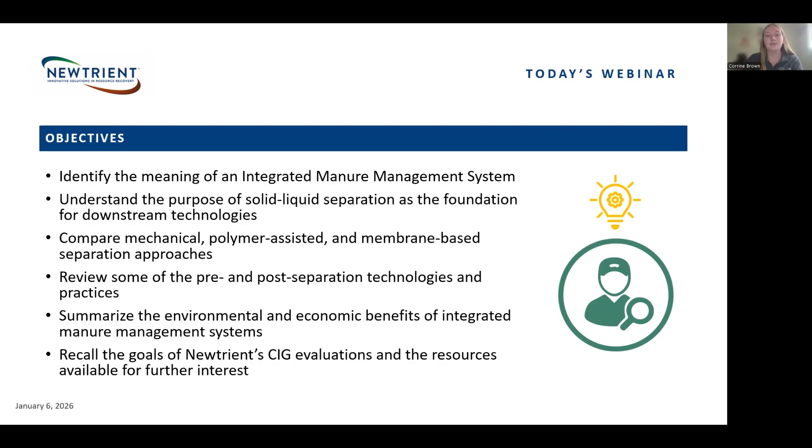Now for a bit about Newtrient. Newtrient was founded in 2015 to help farms identify ways to reduce their environmental footprint while making it economically viable for them to do so.

Our forward-thinking members include milk cooperatives and dairy organizations representing nearly all U.S. dairy farmers.

In 2020, Newtrient received nearly $700,000 from the NRCS to evaluate 15 technology systems and practices, with the addition of one literature review, aiming to demonstrate how these systems reduce the environmental impact of dairy manure with a focus on water quality. Our goal is to improve access to EQIP funding for innovative technologies under Conservation Practice Standard 629 and other associated standards. Partnering with universities nationwide, we collect samples, document the results, and produce comprehensive reports. These reports will be shared with the NRCS and the dairy industry to encourage the adoption of sustainable dairy practices.

With that, I'm excited to introduce Jeff Porter, Technical Advisor here at Newtrient, an agriculture engineer with extensive background with the NRCS, where he served as the leader of the National Animal Manure and Nutrient Management Team.

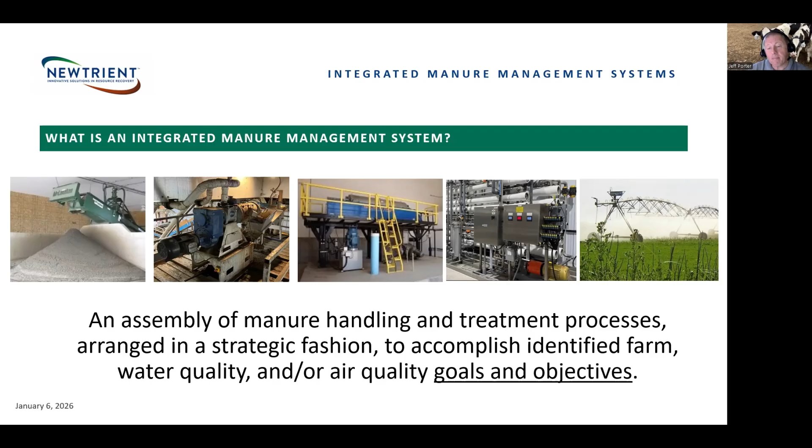Now, the easiest way to look at this is to determine what comes into the system or operation and then what goes out, looking at the big picture, you might say.

Unfortunately, this may not be the most effective way of evaluating manure management technologies. One may not know what goes on inside the operation to get to the individual unit process values.

Even though there is an overall system or grouping of technologies, each process in and of itself should be evaluated separately to determine how it is affecting the operation of the overall system. It's important to break the manure management system into its individual unit processes.

This is where it is important to understand the difference between systems and individual or unit processes. These processes make up the overall system. As one looks at the treatment of animal manure, the individual operations can normally be divided into three main groups of processes: physical processes, chemical processes, and biological processes.

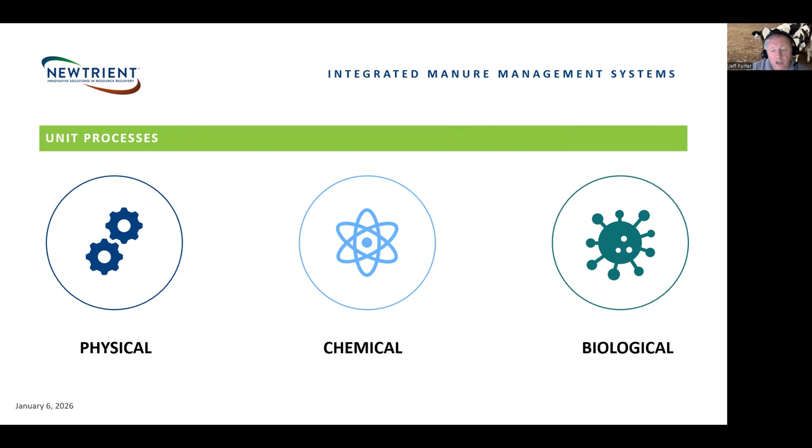And when looking at waste separation, most of the processes are physical. But there are some technologies that utilize chemical processes to enhance the overall separation process.

When looking at a dairy and the overall system operation, there are a number of factors that should be evaluated to help the producer select the technology or technologies that will best meet the needs for that particular dairy. Here we just see a few of the items that should probably be addressed.

And I think first and foremost is that of the landowner's goals and objectives. What do they hope to get out of implementing any of these technologies or practices that they are currently looking at? Are they actually addressing any resource concerns that they may have?

Are they dealing with any excess nutrients? Do they have more nitrogen than they need, or more phosphorus than they need, or do they need to separate it into different partitioning of those nutrients because of the nutrient imbalance between the manure's nutrient levels versus what is needed for crop production?

How much land is available for them to land apply the manure? And also how much land is required based on how much manure they do have.

How do they want to handle the waste streams? Do they want to look at just dealing with solids? Do they want just liquids? Or do they want to look at a combination of both?

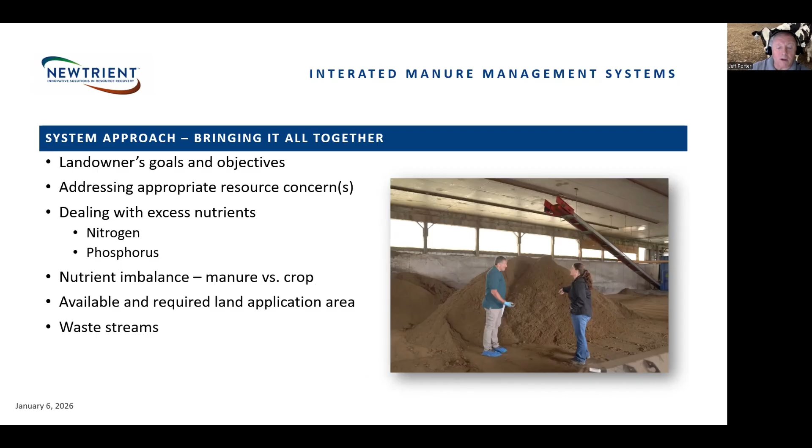These are just a few of the things that they need to be looking at when trying to determine what technology is going to be working best for their particular system or operation.

Now, as part of this conservation innovation grant, we looked at a number of different technologies and processes, all centered to a certain extent around waste separation. I've broken our technology reviews into three sections: pre-separation, waste separation, and post-separation.

Even though there are many more technologies and more are being added almost on a daily basis, these are the ones we reviewed during this study.

Now, one will notice that I included vibratory screen under both pre-separation and separation. As we have reviewed various technologies, we have seen vibratory screens used for both purposes.

Now, to review the information for each of these technologies and evaluations that we did, we're going to be addressing that towards the end of this webinar.

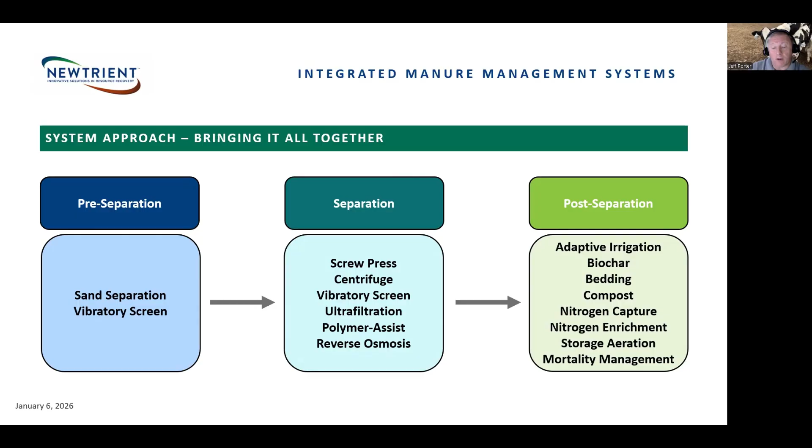Here we see an example manure management system. Since the dairy uses sand bedding, sand separation is necessary for a few reasons. First, the sand can be reused for bedding, which helps reduce the cost of purchasing additional bedding.

Second, sand is very gritty and can have negative impacts on mechanical equipment downstream. Sand removal will help extend the life of other waste separation technologies. Once the sand has been removed, the waste stream flows through a coarse solid separation system.

Some common technologies include screw presses, rotary drums, and slope screens. Now, even though most phosphorus and organic nitrogen is retained in the manure solids, only a small portion, around 10 to 15%, are captured in the coarse solids.

And if higher percentages of nutrient removal is needed, fine solid separation technology such as centrifuges can be utilized. Approximately 50% of phosphorus and organic nitrogen can be collected in the fine solids.

Utilizing ultrafiltration or polymer assisted separation can capture nearly all of the suspended solids, including nearly all of the phosphorus from the waste stream. Reverse osmosis can also be incorporated to remove nearly all of the dissolved solids and the remaining nitrogen.

Now, ultrafiltration and reverse osmosis result in multiple liquid streams with varying nutrient loads, whereas the polymer assisted system can have both liquid and solid as your waste streams.

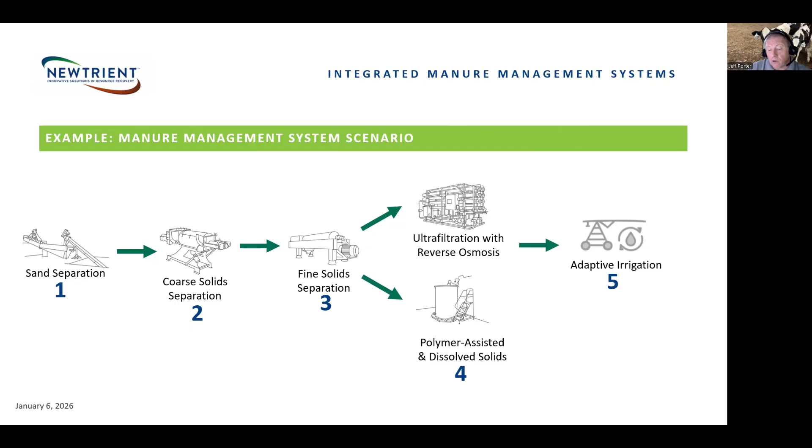The level of waste separation that is needed is dependent on the end use and, again, the producer's goals and objectives. Land application of liquid manures can be utilized following many of these separation technologies.

Let's go into a little more detail into the importance of waste separation and the factors to consider when looking to handle manure and the end uses.

When dealing with manure management, there are usually a number of different challenges or resource concerns that may need to be addressed. Even though every dairy operation is unique, similar challenges are often encountered.

Both water and air quality issues are common concerns. Due to manure solids, waste transfer through pipes and irrigation nozzles can be challenging. Manure nutrient and crop requirement imbalances often have to be addressed as well.

Now, all of these concerns and other issues are why solid liquid separation should be considered when dealing with manure management. Nutrient partitioning is a common reason for implementing waste separation.

Removal of solids from the liquid waste stream minimizes solid buildup in storage facilities and can also lower energy costs by reducing agitation and pumping costs. Other treatment unit processes, such as composting and biochar production, benefit from waste separation practices.

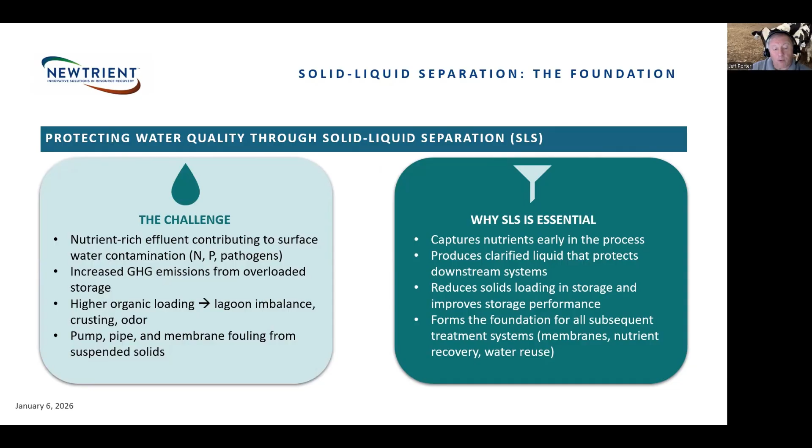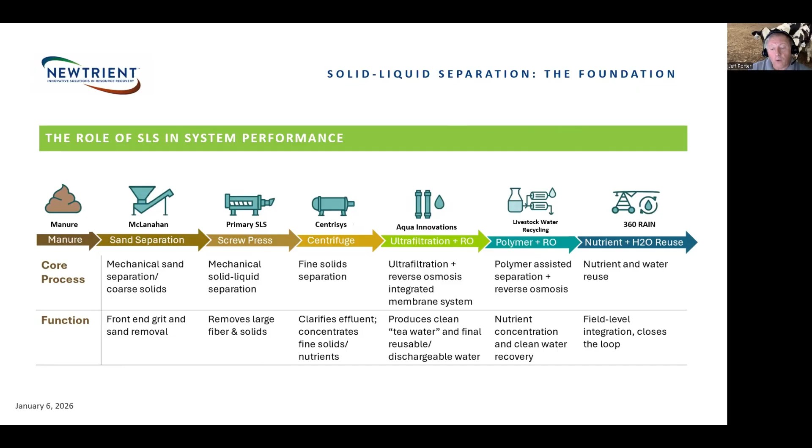The McLanahan mechanical sand separation system removes sand from the waste stream to be reused as bedding and serves as a pre-separation technology, removing grit and reducing wear and tear on downstream equipment. It also reduces the buildup of sand, which is hard to remove from waste storage facilities. There are several models and configurations available for varying herd sizes and layouts.

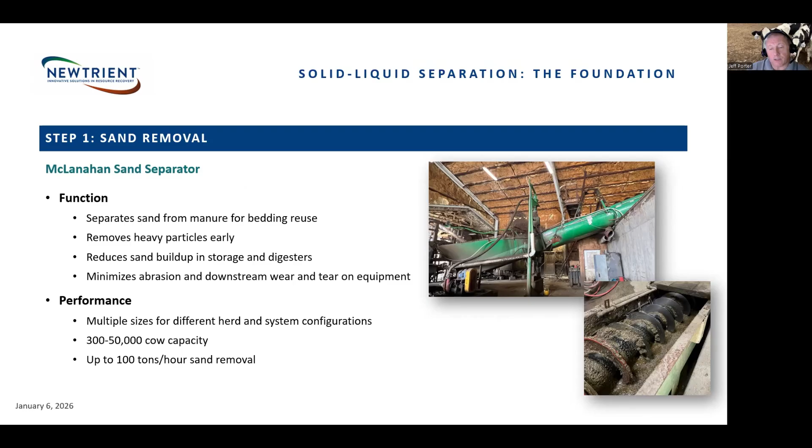Screw presses and slope screens were used in most of the evaluations to prepare the waste streams to improve downstream technology functions through our Conservation Innovation Grant reviews. Rotary drums and vibratory screens are also popular coarse solid separation technologies.

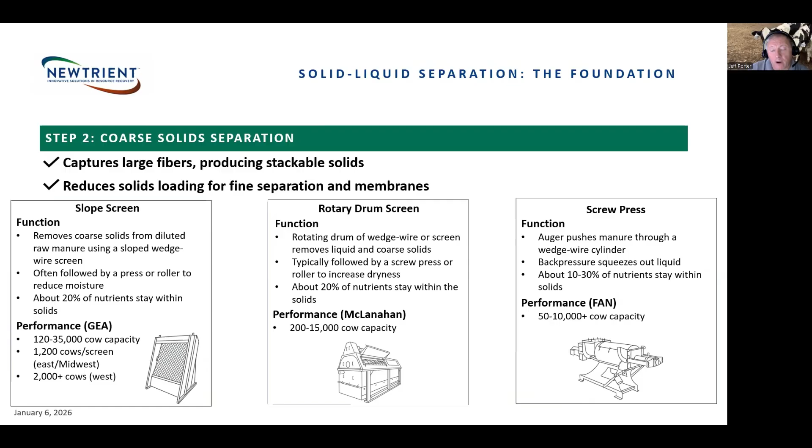These solids, for the most part, are stackable. Depending on the results, moisture content, and different things, these solids could be used for bedding, composted, or directly land applied. Removal of the coarse solids helps reduce the solids loading and operation and maintenance of downstream fine solid separation unit processes. Coarse solid separation technologies can be adapted for a range of dairy operations from small to very large.

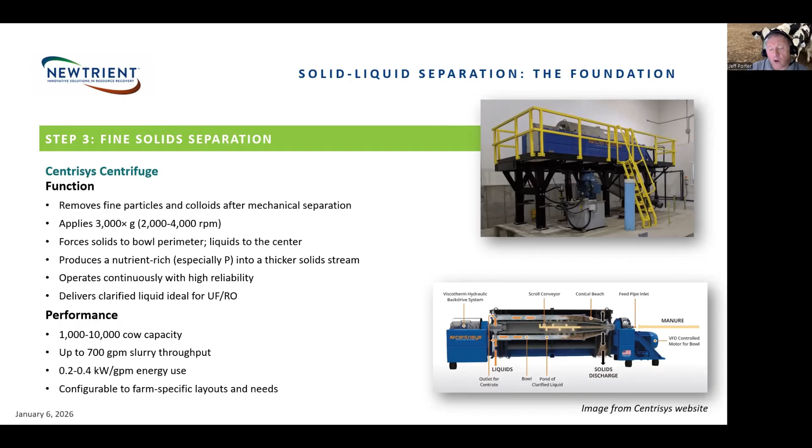A centrifuge was evaluated on one dairy and served as a part of the separation system prior to membrane technology on another operation. This technology operates at very high speeds, generating around 3,000 G-forces. The centrifuge removes smaller particle sizes than coarse solid separation, and as a result, a higher percentage of phosphorus and organic nitrogen is removed from the liquid waste stream. Centrifuges are generally used on larger dairy operations.

Coarse solid separation is normally the first step for most manure treatment systems. Even though sand separation is a waste separation technology, for this presentation I've categorized it as a pre-separation unit process. There are numerous technologies that could be used to accomplish sand separation, both mechanical and passive. Coarse solid separation removes the largest particles from the waste stream. This material can be used for bedding, compost, direct land application, or other uses.

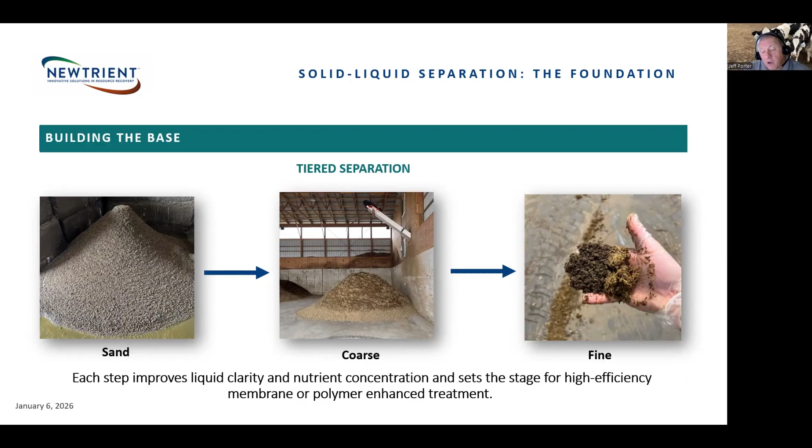Fine solid separation helps to remove more of the suspended solids along with a higher percentage of the phosphorus and organic nitrogen from the liquid waste stream. Now, as seen in the image on the far right, coarse and fine solid separation are compared. The material on the left side of the image shows that the particle sizes are smaller, and the darker color indicates that more nutrients are retained with fine separation when compared to coarse solid separation technologies.

Once the initial coarse and fine separation has been completed, other unit processes can be implemented. Now let's take a look at membrane and polymer-assisted systems that were evaluated through this Conservation Innovation Grant.

Some dairies need to remove additional nutrients or better partition the nutrients so that they can utilize them more effectively. Aqua Innovation's membrane-based ultrafiltration and reverse osmosis system was evaluated through this CIG. Coarse solid separation is a critical component of the overall functioning of this system. Removal of the coarse material helps the membrane filters operate more effectively and reduces operation and maintenance while minimizing the amount of backflushing of the membranes.

This system generates multiple liquid waste streams. The UF concentrate contains nearly all of the remaining phosphorus, while the filtrate still holds a large portion of the potassium and inorganic nitrogen. Even though the ultrafiltration system can run independently, some operations may also choose to add reverse osmosis to concentrate the remaining nitrogen and potassium in the RO concentrate, leaving water that may meet discharge quality. The clean water is around 30% of the original manure volume.

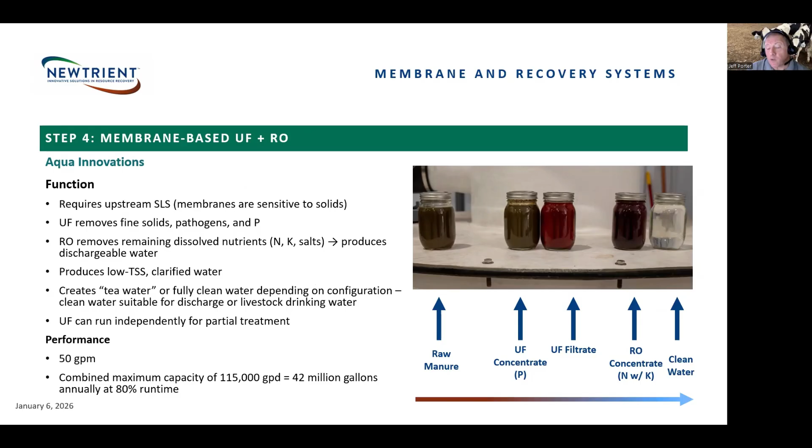Another option for removing additional nutrients from the waste stream is by adding polymers, such as with the Livestock Water Recycling, or LWR, system. Again, coarse solid separation is an essential part of this technology. The more solids removed prior to entering the system, the less polymer is needed to effectively remove the remaining suspended solids along with the phosphorus and organic nitrogen.

One of the differences between membrane and polymer systems is that polymer-enhanced separation generates a solid product, which we discussed just a little bit earlier. Since these solids tend to have high moisture content, another separation technology, such as a screw press, could be used to dewater the solids so that they can be stacked and more easily moved. It should be noted that this additional separation process can allow a portion of the phosphorus to re-enter the liquid stream. Processes up to this point make up what's called the First Wave system by LWR.

If additional processing is desired, a reverse osmosis unit can also be added, generating a high inorganic nitrogen concentrate and water which may meet discharge requirements. Systems can be developed for small, around 100 cows, to large dairy operations.

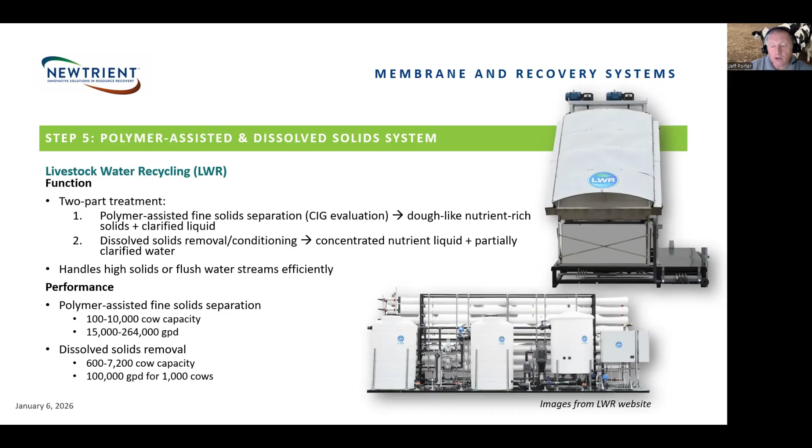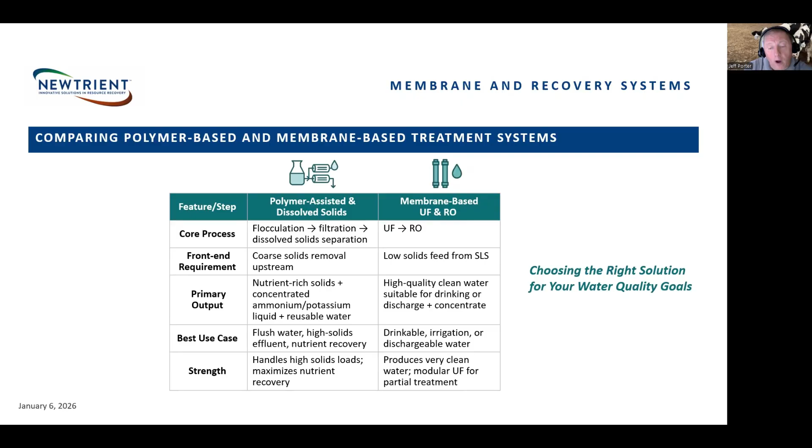Here we see the primary components and operation of the two nutrient recovery systems that were evaluated. As can be seen, both technologies require some level of solid-liquid separation prior to implementation of the unit processes. Both perform nutrient partitioning, and if needed, a portion of the waste stream can be treated to clean water with reverse osmosis.

There are many uses and applications for the solids and liquids from a manure waste stream. The vast majority of the material is land applied and utilized as a nutrient and carbon source. Let's take a look at some of the different applications for waste streams.

One of the unit processes that Newtrient evaluated was the 360 rain adaptive irrigation system. This system can apply fresh water, fertigation, and liquid manure, as well as a combination of any of these. Manure solids up to 10% have been land applied effectively with this technology. Because of the global positioning system utilized with this unit, numerous nutrient applications can be made accurately on a variety of field configurations. The drop nozzles allow for manure, nutrients, and water to be applied near the root zone, maximizing nutrient uptake while reducing volatilization and odor issues. One unit can irrigate up to 200 acres.

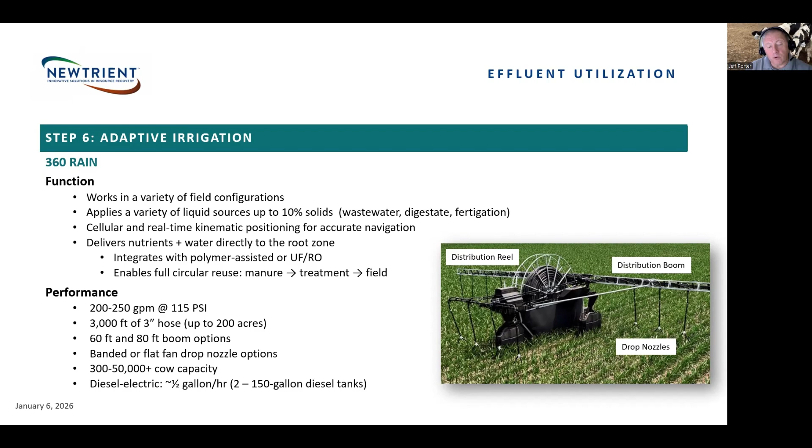As mentioned before, the amount of solids removed from the manure can impact how the various waste streams are going to be utilized or what byproducts could potentially be produced. The coarse solids can be used in a number of ways. At the right moisture content, the solids can be used as bedding or as a main component in generating compost. There are also efforts in generating biochar as a stable high carbon product. Besides land application, other markets are being developed for biochar. These coarse solids can also be land applied. As more solids are removed from the waste stream, nutrient partitioning becomes an important result. As phosphorus and nitrogen are partitioned, field applications of these products can be more designed to meet crop needs, reducing the reliance on commercial fertilizers.

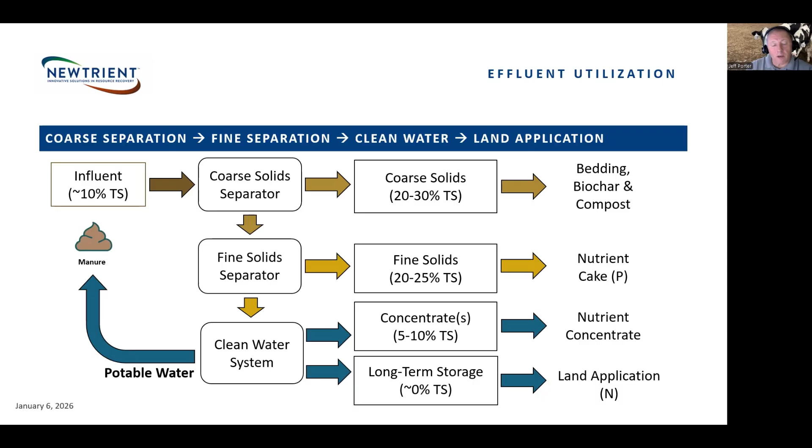Dealing with manure management is something that all dairy operations have to address. Even though most animal manure is land applied for crop production, there are other applications and byproducts that can be generated from this valuable resource.

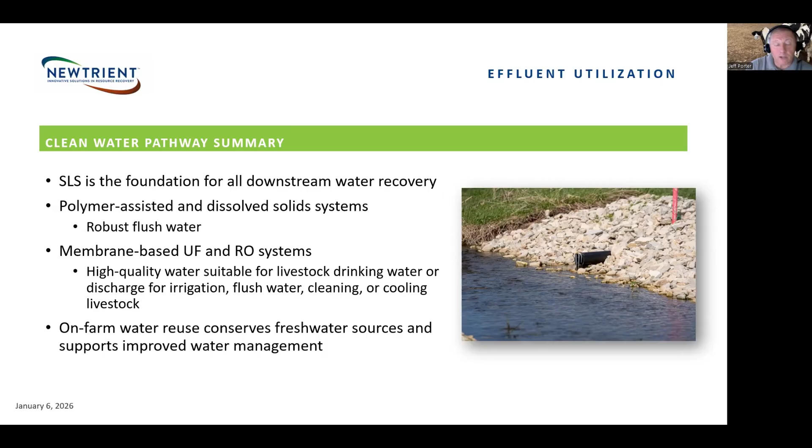For most of these applications, processing of the manure normally begins with solid liquid separation. Depending on the goals and objectives of the dairy operation, the unit processes implemented provide opportunities for more usable nutrients and other byproducts. Practices to generate fine solids, membrane-based separation, and polymer-enhanced separation can be utilized following coarse solid separation processes. Implementation of these and other practices provide opportunities to potentially generate additional income, reduce operational cost, or improve land application methods.

Throughout this conservation innovation grant, Newtrient has evaluated a number of unit processes, focusing on the impacts on water quality. Even though each evaluation focused on an individual unit process, most of the manure management operations included multiple unit processes to make up an integrated system. I'd like to take just a few minutes to look at these systems, operation maintenance, and estimated capital and operational costs.

Here we see a flow diagram of a dairy manure management system located in Wisconsin. For this operation, we evaluated two specific unit processes: mechanical sand separation and polymer enhanced solid separation. This integrated system consisted of several other unit processes. Prior to the mechanical sand separation system, the liquid waste stream flowed through a sand settling lane, allowing the coarser sand grains to settle. Following the mechanical sand separation, it was found that there was less than 3% organic material remaining in the sand, which was going to be reused for bedding.

The remaining liquid waste stream flowed over a slope screen with a roller press to remove additional liquid from the removed coarse solids. Liquid was then mixed with a polymer to create flocs and capture most of the remaining phosphorus in the waste stream. This material flowed over an inclined screen, dewatering some of the flocculated liquids. These solids then passed through a screw press to further dewater the solid material. It should be noted that the screw press broke some of the flocs, and the phosphorus level in the resulting liquid stream was a little bit higher than the liquid collected from the inclined screen following polymer addition. The final liquid was transferred to a holding pond.

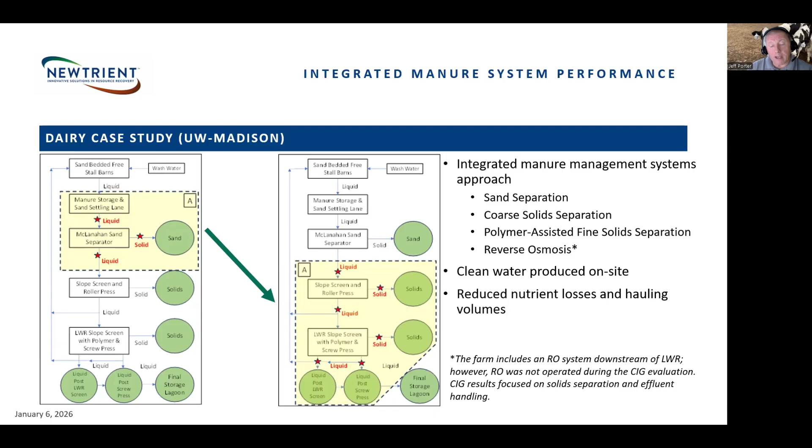For the unit processes evaluated through this conservation innovation grant, there are a number of potential environmental benefits worth discussing. Reducing the solids loading in waste storage facilities can have a small impact on storage volume. Additionally, less solids accumulation in the storage system can impact operational costs by reducing agitation time prior to land application. Nutrient partitioning allows for more efficient land application for crop production, placing nutrients where needed, better matching the crop demand. This helps to reduce runoff and leaching issues. Removal of solids from the waste stream improves land application methods by reducing downtime from clogged nozzles or injection systems. Removing solids from the liquid waste stream also reduces odors during handling and storage.

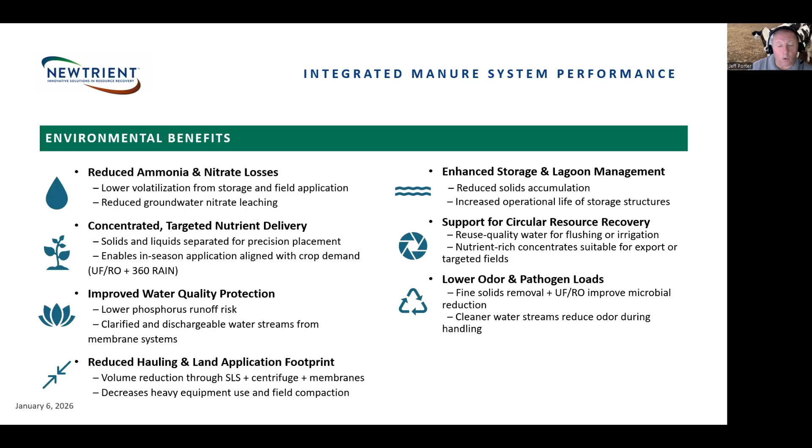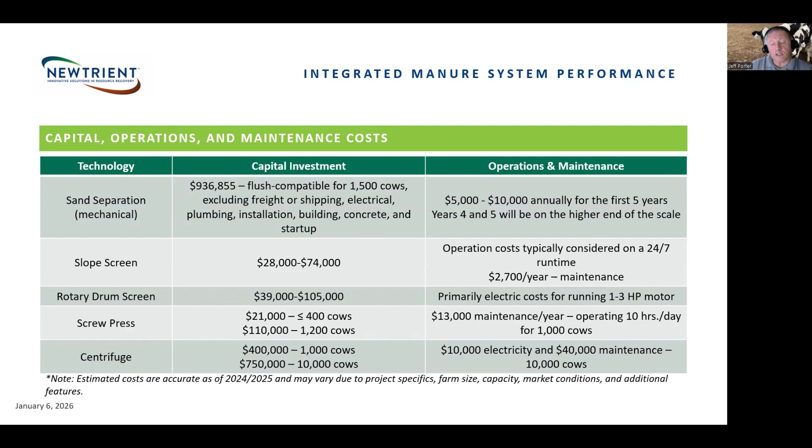On this slide, we see some of the estimated costs for nutrient recovery separation or nutrient partitioning systems. These fine solid separation technologies are climate sensitive and will require roofs and covers. Other ancillary practices such as piping and reception pits will likely be needed as well.

As mentioned earlier, the ultrafiltration system generated different liquid waste streams, while the polymer assisted system generated both liquid, low phosphorus, and solid, high phosphorus waste streams.

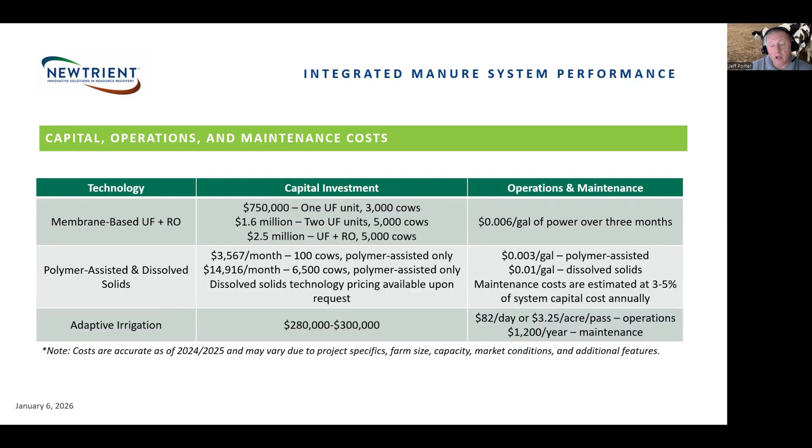The adaptive irrigation system allows flexibility for land application. It can generally be used with waste management systems that have, as a minimum, coarse solid separation. Both capital and operational costs should be taken into account when looking at land application technologies.

Not only should one consider the environmental benefits of solid liquid separation, but there may also be economic and operational benefits from implementing these practices.

Since sand is an inert material, it does not provide any nutrient value and would improve land application if removed by sand separation technologies. Sand removal reduces wear and tear on gears and propellers, increasing longevity.

Agitation costs are reduced when sand and solids are removed prior to liquid storage. Removal of sand and solids can also allow for improved automation of land application systems. Less clogging of transfer pipes and nozzles would be expected.

Now, since less water is contained in separated manure solids, this material can be transported longer distances more economically.

Clean water from the advanced nutrient recovery technologies can reduce the reliance on fresh water and can be utilized for a number of applications on a dairy.

Now, with an adaptive irrigation system, nutrients can be placed near the root zone, improving nutrient uptake and potentially reducing the amount of fertilizers required for crop production.

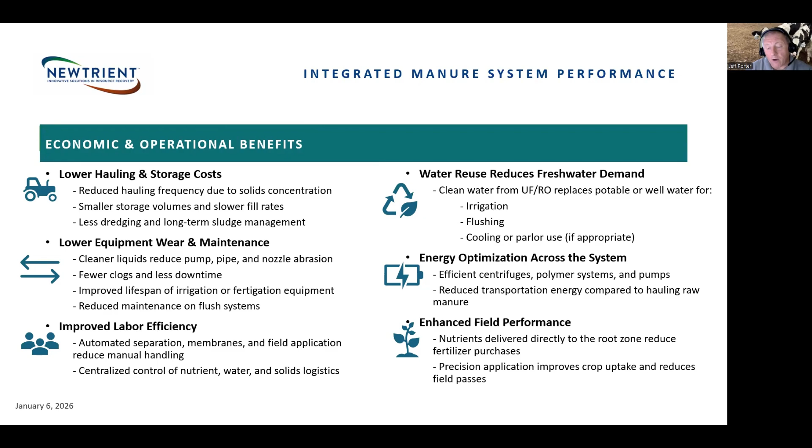When looking at a waste management system, many factors need to be considered. For most of these systems, solid liquid separation is likely one of the first practices to be installed. If sand is also an issue, sand and grit removal can reduce downtime for downstream practices. Coarse solid separation can improve the performance and longevity of other technologies that may be added.

As an integrated system is being planned, each technology should be installed so that it will not interfere with the placement or performance of future practices. Information on technology selection will be addressed in the next section of this presentation.